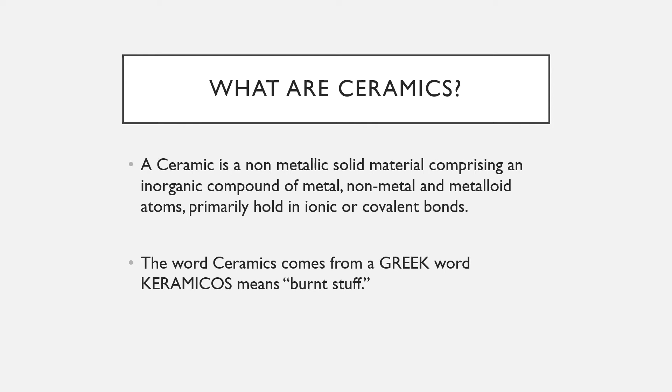A brief description about mechanical properties of ceramics. Here some general mechanical properties of ceramics are described. Brittleness is high, hardness high, elastic modulus high, density low, ductility low.

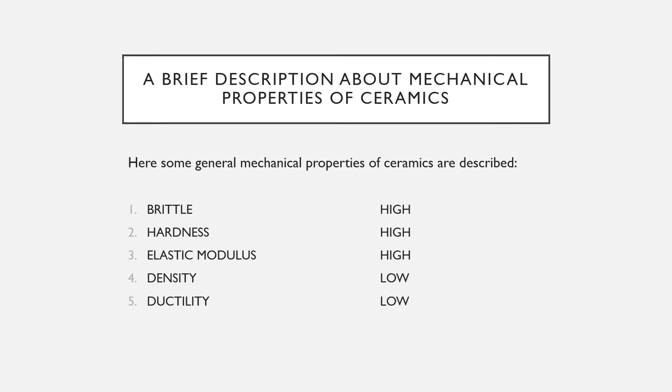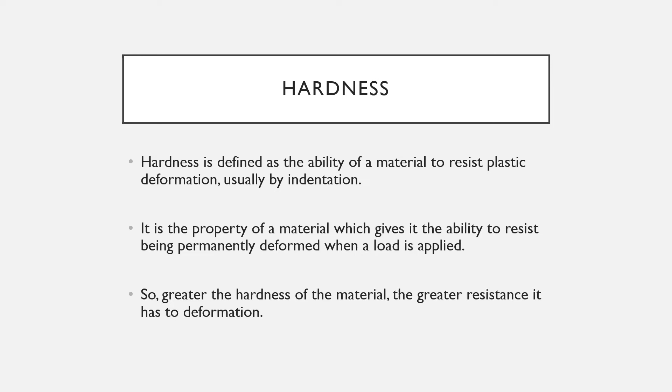Hardness. Hardness is defined as the ability of a material to resist plastic deformation, usually by indentation. It is the property of a material which gives it the ability to resist being permanently deformed when a load is applied. So, the greater the hardness of the material, the greater resistance it has to deformation.

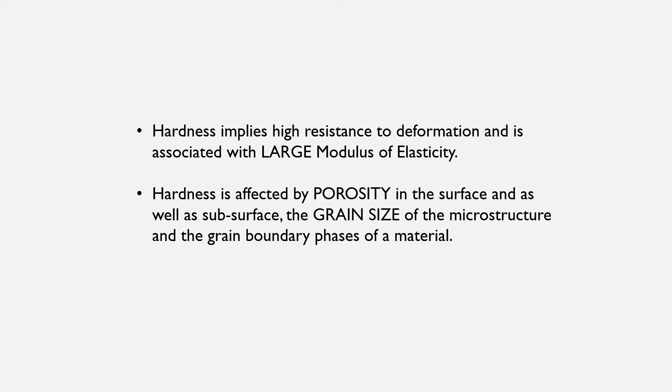Hardness implies high resistance to deformation and is associated with a large modulus of elasticity. Hardness is affected by porosity in the surface as well as subsurface, the grain size of the microstructure, and the grain boundary phases of a material.

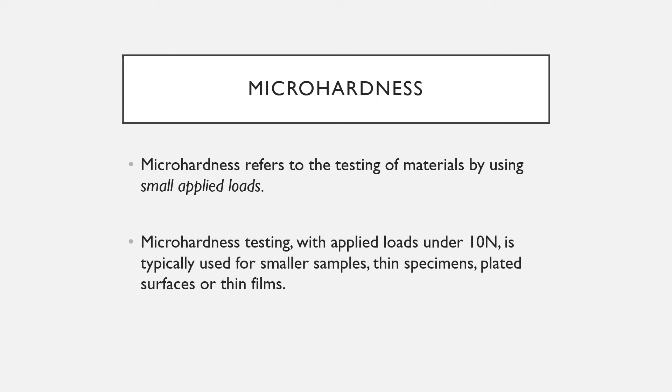Microhardness. Microhardness refers to testing a material by using small applied loads. Microhardness testing with applied loads under 10N is typically used for smaller samples, thin specimens, plated surfaces or thin films.

Young's modulus. Young's modulus is also known as elastic modulus. It is defined as the ratio of the stress below the proportional limit to the corresponding strain. It is the measure of rigidity or stiffness of a material. The greater the modulus, the stiffer the material. In other words, the elastic strain resulting from the application of the resulting stress is smaller.

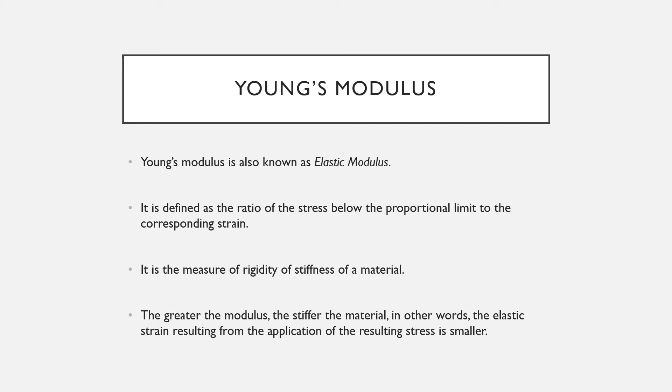Fracture toughness. In metallurgy, fracture toughness refers to the property which describes the ability of a material containing a crack to resist further fracture. It is a quantitative way of expressing a material's resistance to brittle fracture. Brittle fracture is a characteristic of materials with less fracture toughness.

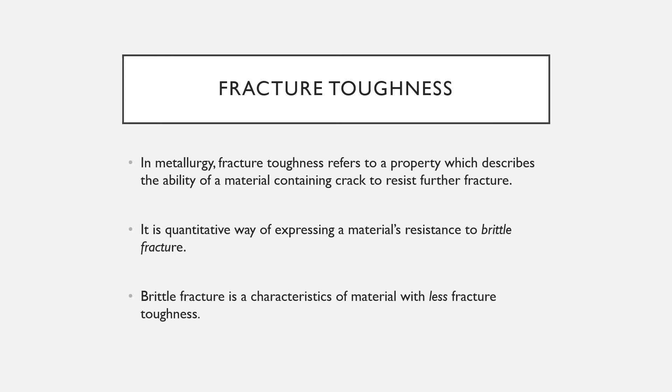Instrumented testing. The determination of the mechanical properties like Young's modulus and hardness is carried out using an instrumented microhardness testing machine. In instrumented indentation, the microhardness testing machine performs continuous measurement and the results are automatically generated, which can be obtained from the system.

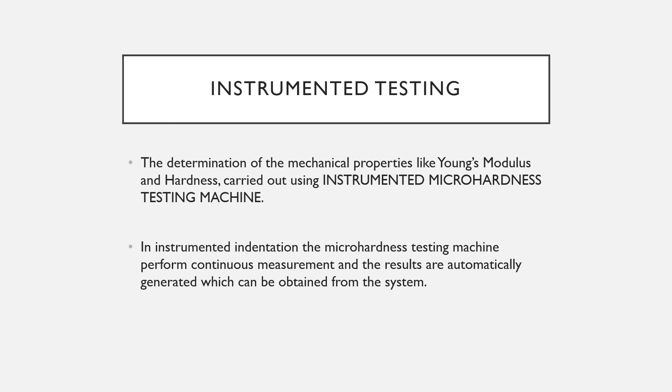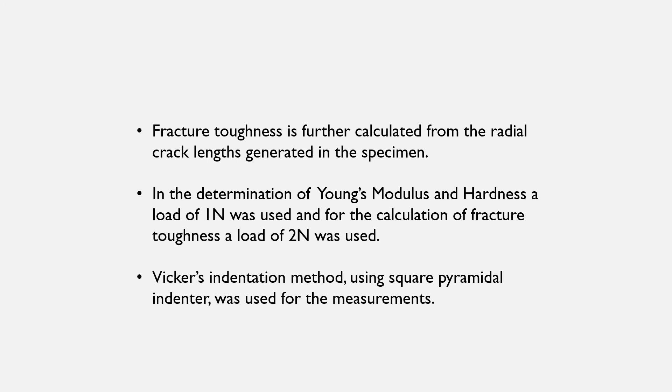Fracture toughness is further calculated from the radial crack length generated in the specimen. In the determination of Young's modulus and hardness, a load of 1 Newton was used, and for the calculation of fracture toughness, a load of 2 Newton was used. The Vickers indentation method with a square pyramidal indenter was used for the measurements.